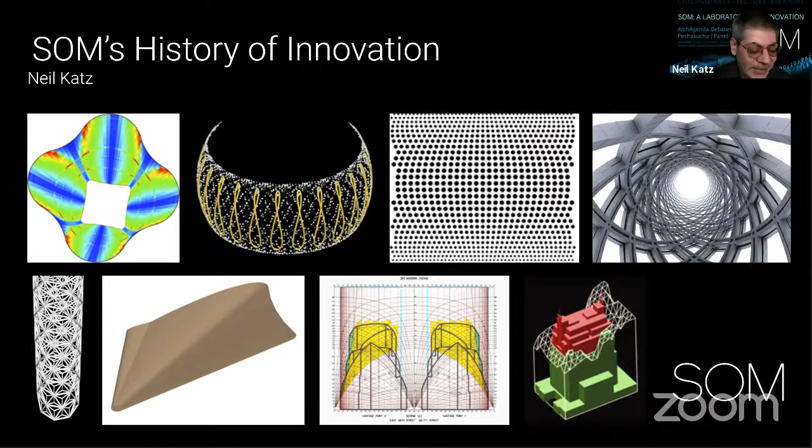Since the 70s, SOM has explored and experimented with computational devices as tools to enhance our process of design and delivery of our projects. There was no off-the-shelf tool available at that time, although there was research in this area also taking place in academics, such as at Cornell University with Don Greenberg.

SOM decided to take on their own research and develop a set of tools. The set of tools, with names like Draft for modeling, Plot for printing drawings and images, Render for visualization, SDMS for structural analysis, and several others, were developed in collaboration with architects and engineers who were eager to use these tools as they worked on actual projects.

If you visited SOM's office in the 1980s, you would have seen equipment that you would probably not have seen in any other architectural firm. If you visit our offices today, in terms of equipment, there's nothing extraordinary.

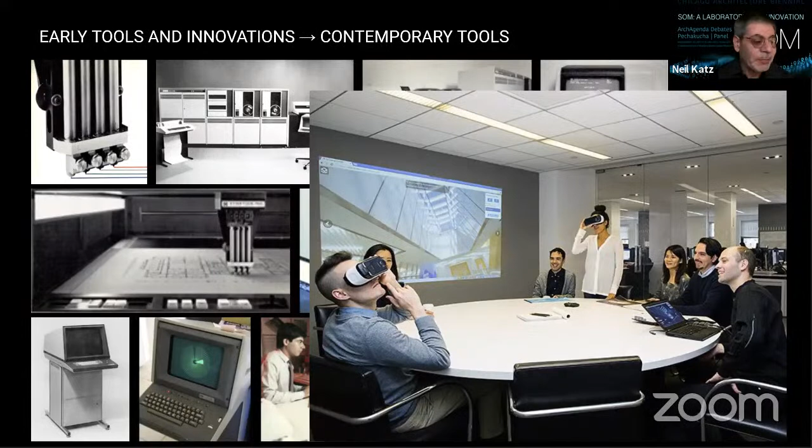But innovation, of course, is more than hardware or even software. While there are experts in the office using and developing tools and technology, our goal, since we started developing our own software, has been to distribute the use of these tools, and even the development and workflows that accompany them, among teams working on projects.

At the time of the development of our proprietary tools, SOM had offices in 9 cities in the United States. And as an example of the potential of these tools, we created a video of fly-throughs of our models of each of these cities.

Images, animations, VR, visualizations of our projects today in their urban context are often indistinguishable from photographs, so very different from what we were doing 40 years ago.

In addition to photorealistic visualizations, we use many visualization and documentation techniques, capturing physical aspects of our models, as well as aspects which are not visible.

The Hajj Terminal in Jeddah is an early example of the use of our computational design tools for both architecture and structural design. A more recent aviation terminal is an example of applying innovative computational thinking and tools on contemporary projects. These two projects share a dependence on both engineering and architectural expertise, on innovative use of materials, a focus on sustainability and natural daylighting, and on computational thinking and computational tools.

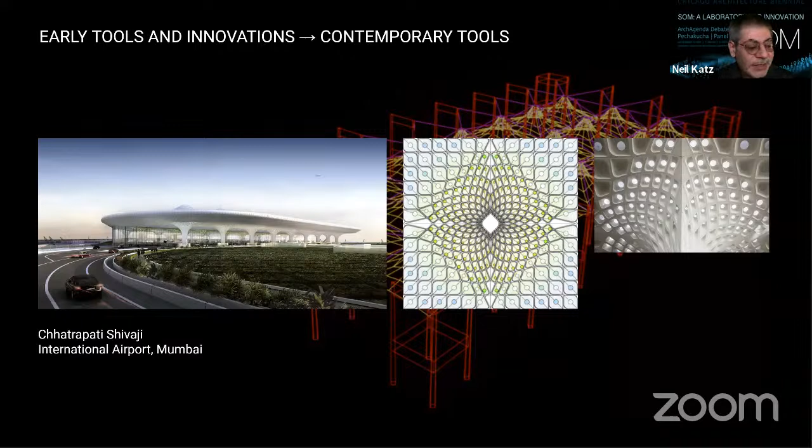There are a few projects which have spanned many years at SOM, living through many changes in technology and innovative processes. Moynihan Train Hall, an adaptive reuse of a landmark building in New York City, is one such project.

The design process, spanning about 20 years, has been modeled and designed using SOM's proprietary software at its beginning, then using our customization of AutoCAD, and then taking full advantage of BIM using Revit.

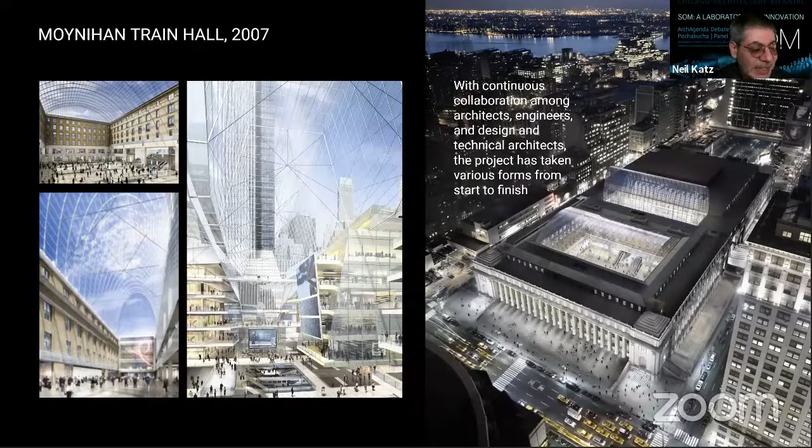From modeling the existing structure with the help of laser scanning to collaborating with engineers specializing in lightweight structures, this project has been a successful experiment in applying innovative processes and using and developing innovative tools.

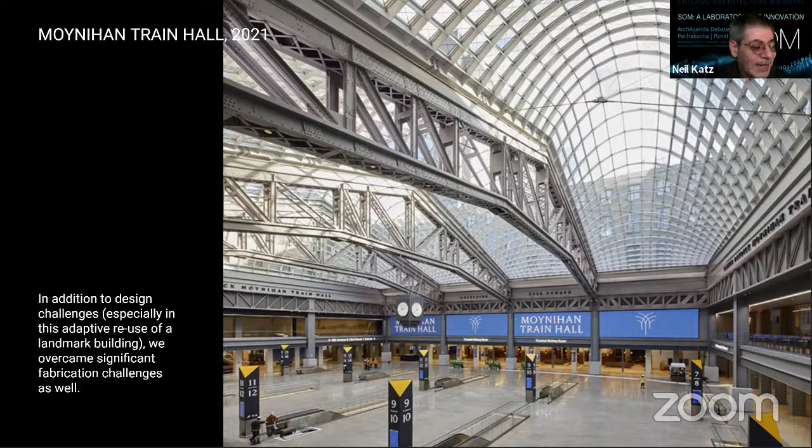Even the fabrication of the skylights of the Moynihan Train Hall requires substantial expertise in geometry, engineering and analysis, and documentation.

Interdisciplinary collaboration is a distinguishing feature at SOM. Even at its founding, Louis Skidmore and Nathaniel Owings were architects and John Merrill was an engineer. Bruce Graham and Fazlur Khan continued in this tradition, and the Hancock Tower is just one example of many. This philosophy and culture is as strong today as ever.

In 2017, SOM created an exhibition for the Chicago Architecture Biennial, which showcased the contributions of SOM's engineers, whom we also call designers in architecture. Our engineers have also collaborated with other architects and many artists.

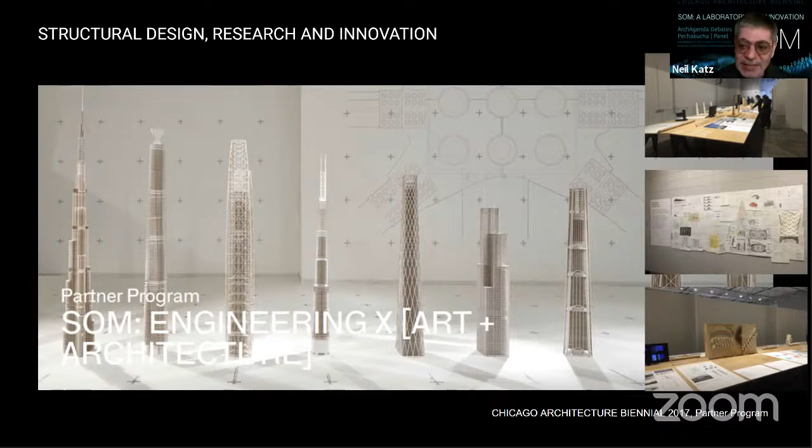In addition to the gallery of SOM building models, in which only the structural components are shown, because the structure is such a distinguishing feature of our work, each one of the models is immediately recognizable. The towers are arranged in size order, so the structural innovations to enable unprecedented heights are apparent. We also showcase some of the research that we had been doing and are still doing in structural design.

An ideal example of the collaborative nature of SOM's practice, and another one in process, is the Penn Station 33rd Street entrance canopy. Form finding with structural analysis tools and close collaboration with fabricators have led to this gem of a subway entrance at one of the busiest subway stations in Manhattan.

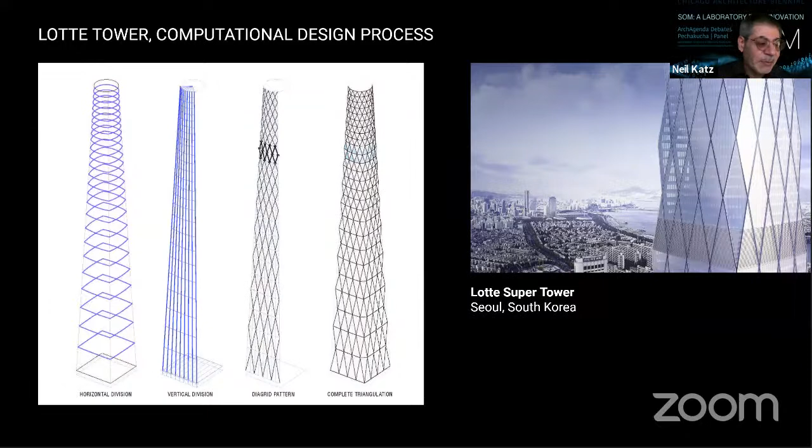Another example is the Lotte Tower, a mixed-use building with a distinctive diagrid, which varies from bottom to top, as does the floor plate. In addition to innovations in the design of the Lotte Tower, we also developed and documented in this paper a method of sharing project information, not only among project team members, but also among the various tools that the team was using.

Interoperability, which SOM designed into our own tools in the 70s and 80s because we needed to, became a challenge as we began to use different tools for different applications.

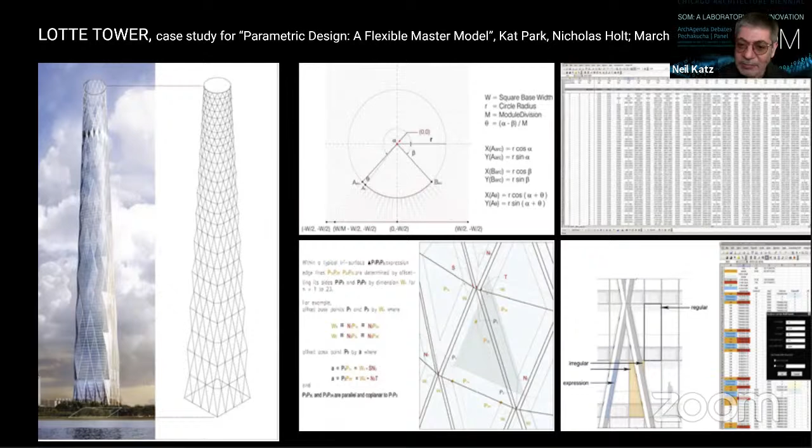Nathaniel Owings in 1969 said, 'Civilizations leave marks on the earth by which they are known and judged. In large measure, the nature of their immortality is gauged by how well their builders made peace with the environment.'

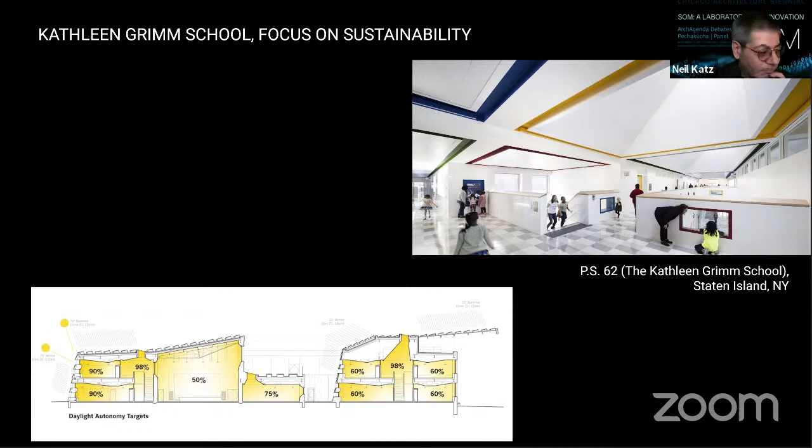There's a strong internal collaboration within SOM on projects and on research. We also collaborate externally with other design and technical professionals, with builders and fabricators, government agencies, and academic institutions.

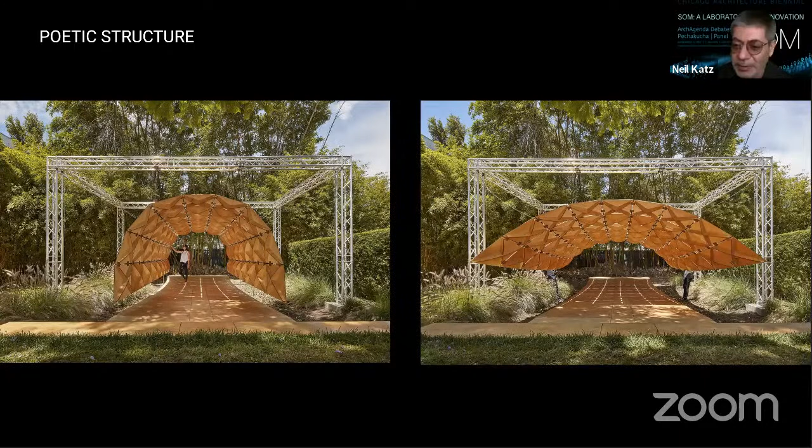To sum up, there's much to be learned from experience, and SOM's legacy and innovation in computational design, among many other aspects of design, documentation, materials research, sustainability, and construction, provides much material and inspiration for us at the firm today, and many others in the field, from students to professionals.

Research and innovation is sometimes blue sky, but most often project-focused or project-inspired, enabling us to explore ideas that improve a process, design a better project, increase efficiency both of our process and also of our projects, and expose forms and ideas that would otherwise be unexplored.

The scale and complexity of many of our projects necessitates many aspects of research, from structural systems to design workflows. At SOM, we share a passion for the projects we work on, a collaborative, interdisciplinary environment, and for the research which spins from these projects and then gets applied to many projects in many ways.

The following presentations will reveal a varied set of research initiatives at many scales, touching many disciplines. They're representative of the vast interests at SOM and the culture of our practice, which allows and encourages these innovations and initiatives to happen.

Thank you so much, Neil.

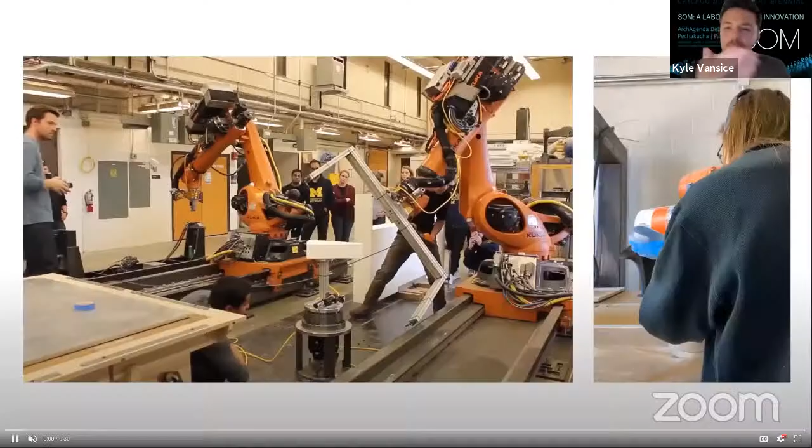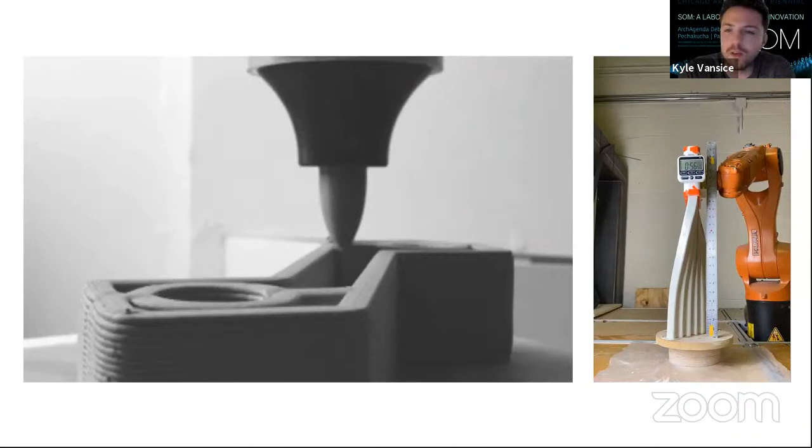This came from the legacy that SOM has of digital meets material innovation. A lot of the projects that Daniela mentioned, in response to Benton's bio, are projects where we're trying to bring what we can imagine out of the computer and use advanced fabrication to make them a reality, make it a material reality.

We've been working with the University of Michigan over the last 3 years in a series of workshops, but also studios, where we're looking at things like robotic stereotomy and robotic slip form casting, and more recently timber manufacturing, and how we can always look at what's going on in the lab and how that can scale to a manufacturing level and get directly into the construction industry.

So we have this idea of a building demonstrator that we've been deploying at the biennial, but we also want to fit into the biennial's key themes. And this year it was all about finding innovative ways to utilize what is traditionally underutilized and underinvested spaces in the city of Chicago. So the Available City was about getting out into the city, decentralizing the biennial and making it much more about the people that don't normally interface with architecture.

So we partnered up with Epic Academy, which is a charter school on the south side of Chicago, to build an outdoor classroom. There's always this kind of dueling prerogative or dueling goal. So again, what would the lightest weight timber slab look like in the context of an outdoor classroom?

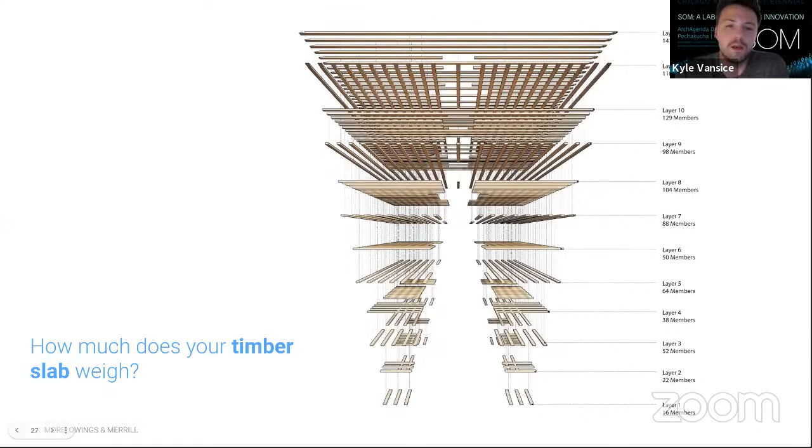And when we started to design an outdoor classroom, we found that the mission was actually quite different than what we initially expected. What we initially expected was that we needed to create a space outdoors that was adjacent to the school within its grounds, its property line, that would support certain pedagogies that you might want to be focused outdoors instead of indoors.

But in reality, and especially on the south side of Chicago, it's about creating a bridge to the community and breaking down the barriers. There's this kind of weird interstitial space between the school and the community, and no one goes there. Leondra Khan, who's the executive director of Epic Academy, was very much interested in this being a space where the community and students would come together.

And this is really important, especially on the south side of Chicago, where University of Chicago and other institutions, schools, they're large brick buildings, very monumental, and there's this kind of tradition of maybe a bit of separation between the school and the community.

So there's already been a number of classes and partnerships with Chicago State University. Epic Academy has a really cool drum line, and this was a workshop that Chicago State had done in conjunction with that drum line, looking at more traditional African American drums developed in the United States of African lineage.

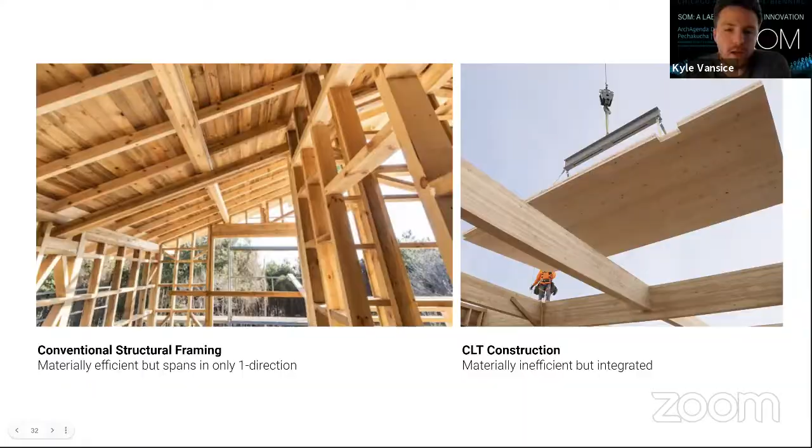As Kyle was mentioning, what we're trying to do is really find that sweet spot between conventional framing and super efficient structures. We did something similar for Stereoform, trying to find the right amount of innovation. On the left hand side, having uniform joists isn't the most efficient thing, but it's easy to build. All the way on the right, an extreme example is curved joists following the lines of principal stress—much more efficient, but a lot of complexity. So really, what is the right amount of complexity that can drive the changes we're looking for?

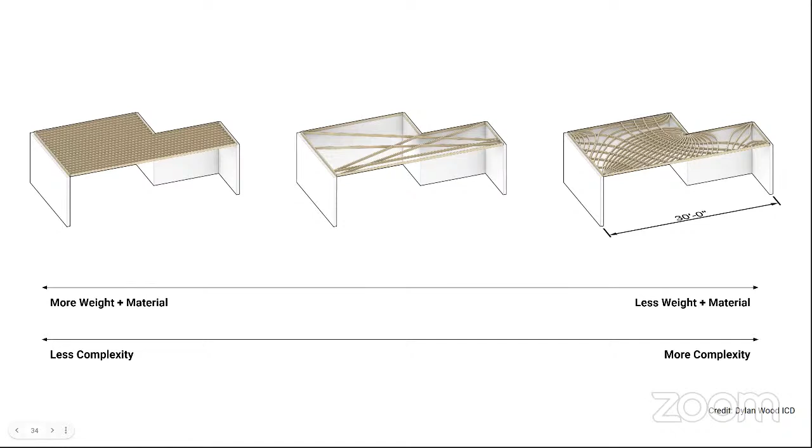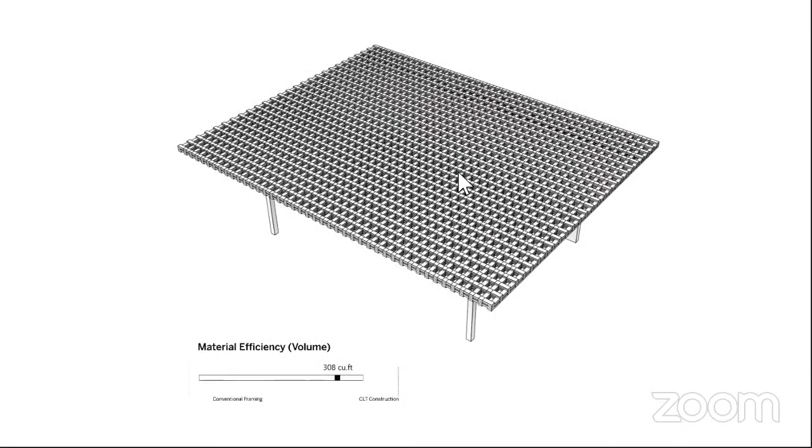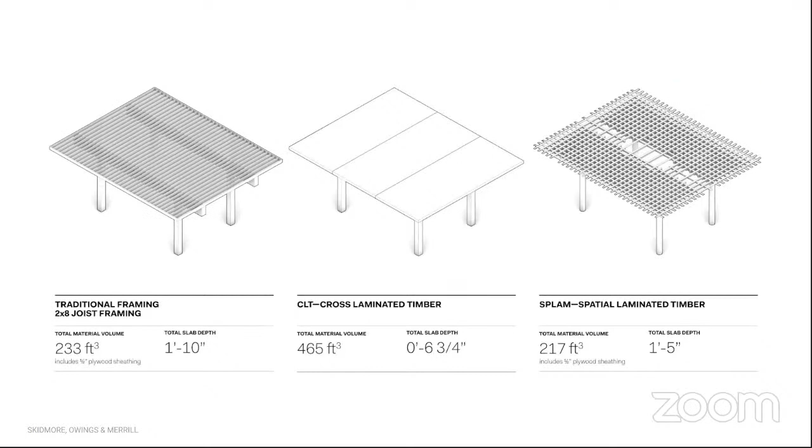After we applied this process to Splam, you can really see the value here—the material is carved away from the middle. What we're able to do is get something competitive in terms of thickness with CLT, but using an amount of material that's similar to conventional joists. I know you wanted to mention something on this, Kyle. No, I just want to make sure you saw the slide.

I really like this video where it's zooming out, because it really shows what the thing is all about. It's pulled right from the computer. You see the gaps in the middle where there's low stress points, and the density increases as it moves towards those columns and those four support points.

Yeah, the result is... Go ahead, Cal. Yeah, sorry. But yeah, so this is a bespoke design, right?

We designed it for this space, for this school, but we have ambitions to take this into a more modular level. So to do that, we really focused with Michigan on a prefabricated modular system for timber joinery. Here you see Wes McGee and Tien and a few of the students that worked on this project over the summer with us. This was a year-long studio, but it went into the summer, and fabrication actually took place in June and July, with an opening in August.

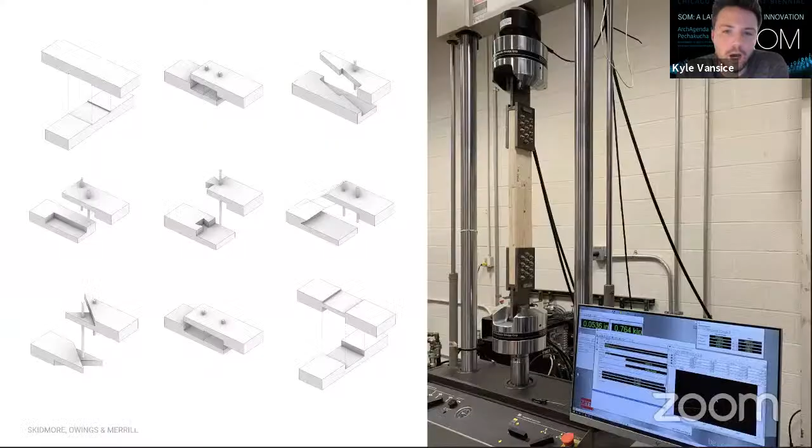We really got scientific about the joinery. It turns out that in these systems, the joinery is the most critical spot in terms of stress concentration and shear transfer. So we worked with the civil engineering department, got out our Japanese joinery books, and tested a number of different joinery types, then brought those empirical results into our design models, and used that to optimize the types of joints, the number of members, and the number of unique joints.

Here you can see a 5-axis mill creating what's called a scarf joint. But it's actually a kind of dual joint—there's a scarf at the end and then a lap joint. The lap joint is just a minimal depth joint, really to help with dimensional tolerance of the system overall.

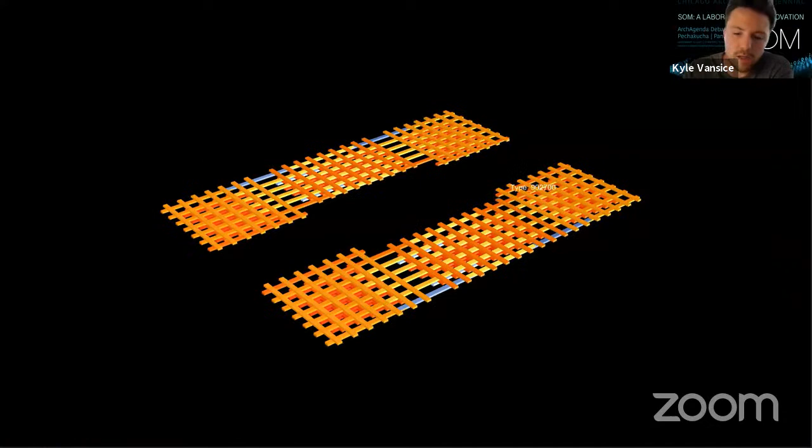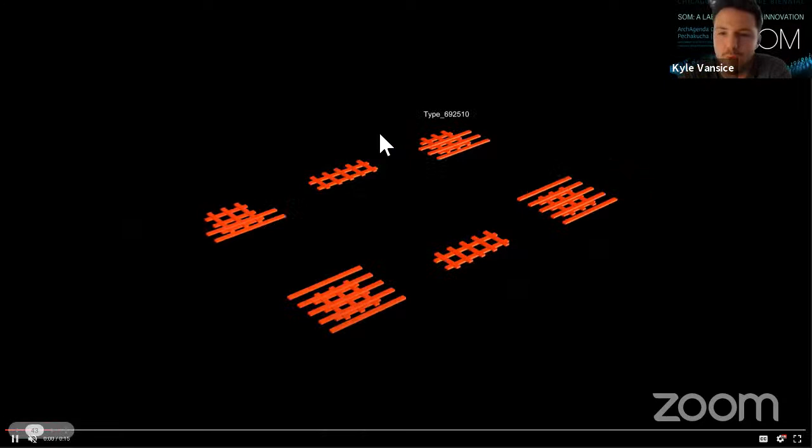We used this data and a feedback loop with the structural model to understand unique types, and ended up with 912 total members, 50 unique types. Our goal is to minimize the number of unique types—the more we can do so, the more efficient it becomes from a constructability standpoint. But the trade-off is the ability to approximate an optimal topology and create hyper-responsive systems, so there's this back and forth between uniqueness and standardization we're trying to explore.

And here they are, 912 members getting ready to be shipped to Chicago. And here it is in built form before the roof—quite beautiful, quite expressive. If you ever wondered what the lightest weight timber slab for a commercial building might look like, well, here is something probably pretty close.

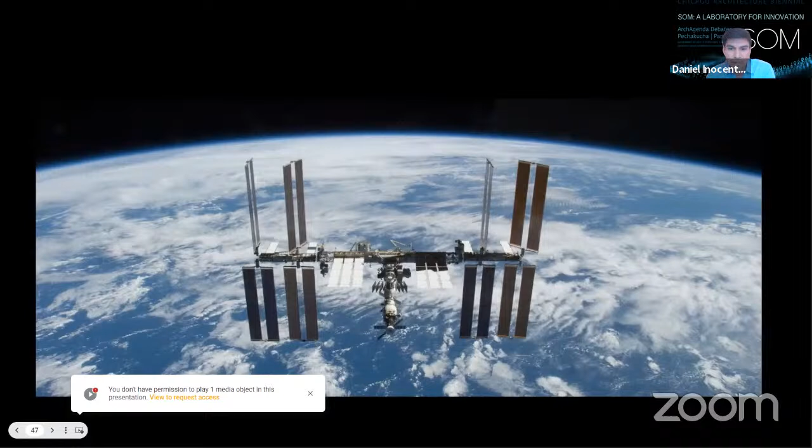At the same time, space exploration has made major leaps in the last couple years, with private companies developing and proving new transportation systems, and even creating and engineering an entirely new architecture for heavy lift vehicles like the Starship by SpaceX. But these are just a couple of examples of some of the more recent achievements by the space industry. And so one of the questions we started off with was, why the moon?

Well, out of all the celestial objects in our solar system, the moon is the most accessible, with launch windows at any time. The moon is also a laboratory of planetary science with a deep geologic history going back to the formation of planet Earth. The history of the moon is also the history of Earth, where dynamic processes make it difficult to access geologic history.

The other important characteristic of the moon is that it is in synchronous orbit with the same face pointing towards Earth, which means that the moon's exposure to sunlight is near continuous. The moon has a spin axis, which is inclined by 1.5 degrees to the ecliptic plane. And this creates these kind of microenvironments at the polar regions where you have abundant exposure to sun, but also areas where you have permanent ice deposits, which is one of the interesting things that different missions have started to revolve around.

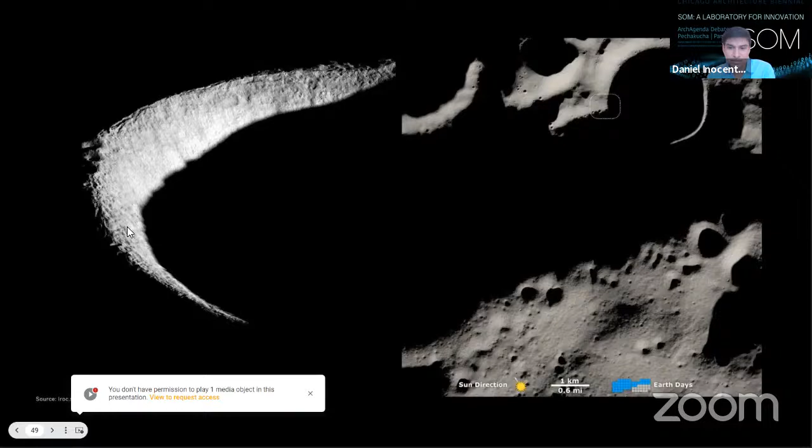So in January of 2020, a memorandum of collaboration was signed at ESA's headquarters, where we went to ESA's offices and we met with the Director General, and we signed an MOC to advance the cooperation that we had established since 2018. And so this led to a CDF study, which took place at ESTEC.

A CDF study is ESA's concurrent design facility capability, where they can conduct a cross-disciplinary effort to really assess whether your technology is being developed in the most appropriate way. The ESTEC team composition included experts from systems, mission architecture, structures, thermal materials and processes, mechanisms, radiation, power, life support, advanced concepts, just a wide range of different capabilities to really understand how the architecture that we were developing was performing. One of the key aspects of this was also thinking about future ISRU structures, or in situ resource

I'm sorry, can I—structures. Interrupt you for a moment? Sure. Okay, there's a message on here that says you don't have permission to play this media. But this is, there's no media here. The presentation is being live streamed. There's no media here. Okay, I just wasn't sure if you meant the slides.

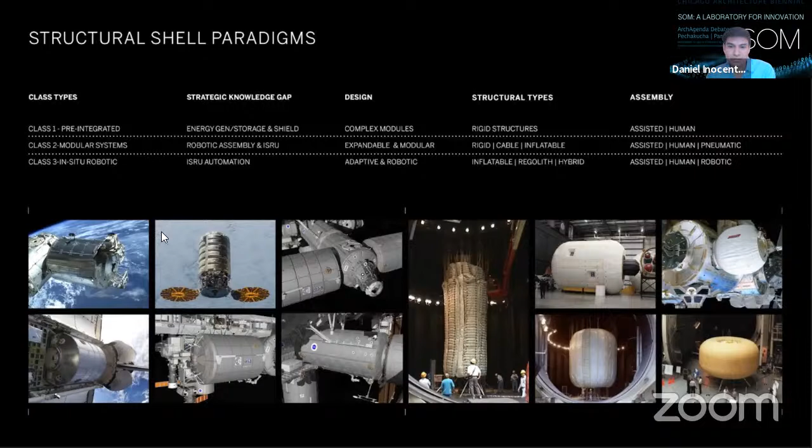We also studied a wide range of habitat architectures, most of which exist on the ISS. The ISS is currently composed of more than 16 pressurized modules, but those are primarily made from aluminum isogrid structures. There's also other types of materials being used, lightweight materials, composite materials like Kevlar and Vectran. Although Kevlar has been used in the past by NASA to study how inflatable structures could become space habitat architectures, for this study we looked at a material called Vectran, which is five times stronger than steel, but ten times stronger than aluminum by weight.

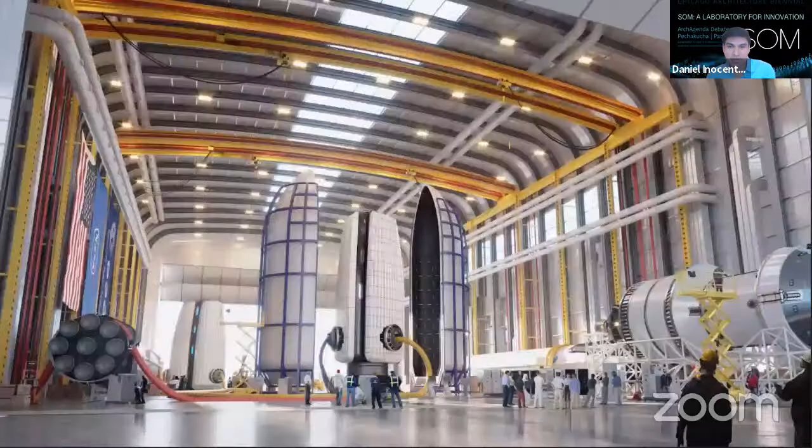And so the architecture that we developed became this hybridized system where we have a combination of both metals and composites coming together to work as efficiently as possible to create this sense of space and just basically create an environment where astronauts and the occupants can really do the work and the scientific experiments that they need to do.

And so we established a very rigorous methodology to approach the problem. First, by looking at what are the concept of operations, what are the system design drivers, and then what are the criteria that we're actually designing around. And then the mission phases—obviously there's a lot of things going into play here because space architecture is very complex. But when you think about space architecture, or just any space-rated vehicle, you have to think about testing. How do you launch it? How do you transport the vehicle? How do you land it? How do you deploy it once it's on the surface? And then how do you transfer it to its final building site where you can assemble and operate it?

In terms of human factors, there's a lot that goes into thinking about how you can engineer an environment for its occupants. Things like visibility, lighting, atmospheric pressure, temperature, humidity, physical mobility, just being able to move through the spaces, because you're in a reduced gravity environment.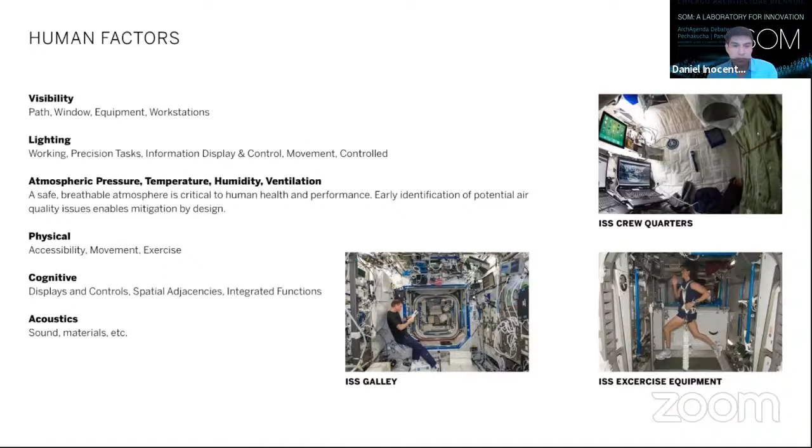And so that means that you have to think differently about the interfaces. Things like stairs have to be designed differently. And also just in general, thinking about material selection and how you can create a very safe environment for its occupants. So there's definitely a lot of different factors that you have to think about as you're designing these kinds of spaces.

And so these images just illustrate the two types of environments that we were primarily focused on. One was the working environment, and the other one was the living environment, where the living environment has to integrate as many technologies as possible.

So there's some way of approaching architecture where you're starting to think about the machine to human interaction. And there's a lot of embedded technologies in your surfaces, in your geometries, in your materials. And that really helps remove all that equipment from the spaces where you typically see that on the ISS.

And so we really try to plan this in a way where we can think sequentially about the logistics. So in its pack configuration, the outer shell actually comes in, but once it's deployed, all the equipment, the racks, all the things that are being used for experiments, all of that has to be projected to the perimeter. But it's also supported by a floor system that is kinematic and tucked in underneath the primary floor structure when it's launched.

And so the habitat really aims to address functional, environmental, and performance constraints, but also place an emphasis on human-centered design principles, which are characterized in the architecture, which is expressed by the unique hybrid structural system.

The result was a net habitable volume of 390 cubic meters and a net habitable area of 104 square meters. One of the things that allowed us to do this was that the primary mechanical systems were located within the composite floor assembly instead of in the core, where that has been studied in the past.

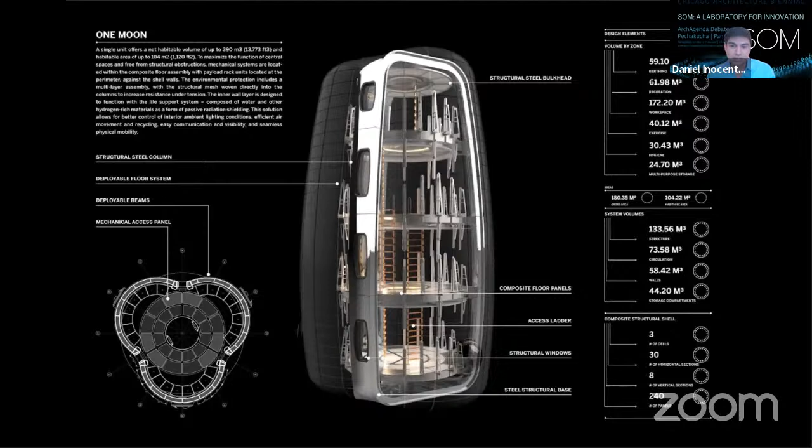And the payload rack units are mounted near the center, like I mentioned before, and then once it's deployed, they're pushed to the perimeter. And that actually improves the environmental performance for other reasons, which I'll talk about in the next slide. And that has to do with radiation, because radiation is one of the biggest challenges in space.

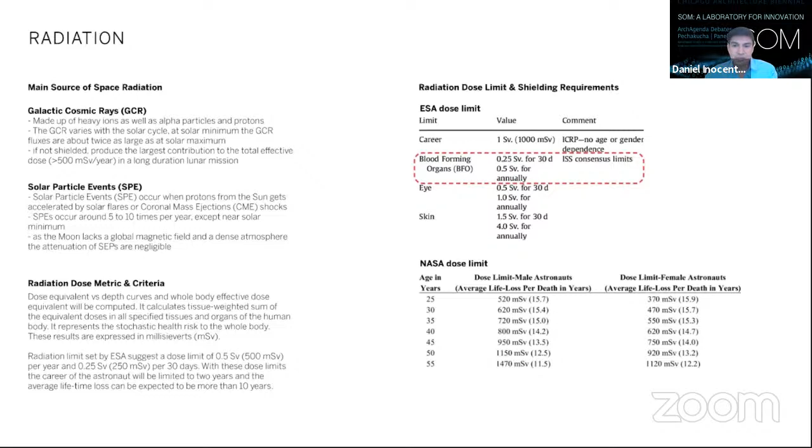And so there are already some standards for radiation. NASA has set different limits for different age groups depending on the kind of exposure. The kind of exposure is very different when you're on the ISS, for example, compared to when you're on the moon.

And that has to do with the amount of material between you and the outer space environment. And so we also studied the kinds of materials that would be the most beneficial for helping mitigate irradiation. You can see here that we're actually using an open source software called OLTARIS to look at how metals, how other composites perform under radiation. And the one thing that we've discovered, and at the same time has been documented pretty well, is that materials with a lot of hydrogen really help improve the reduction of radiation.

And so if you can bring materials together in a very unique way, you can actually help improve the overall performance of the architecture and increase the mission duration. That's why when you put more material between you and the outer space environment, it actually helps improve how the architecture is performing.

And so here you can see that we thought very carefully about how this window structure and the composite shell came together. And I think what's really clear here is that there's a lot of layers that go into this assembly. One of the most complicated things which we studied was also thinking about how you pack this assembly, because it's not just a shell — you have to think about insulation, you have to think about impact protection, you have to think about pressure seals, and then finally you have to think about the materials that the occupants are interfacing with.

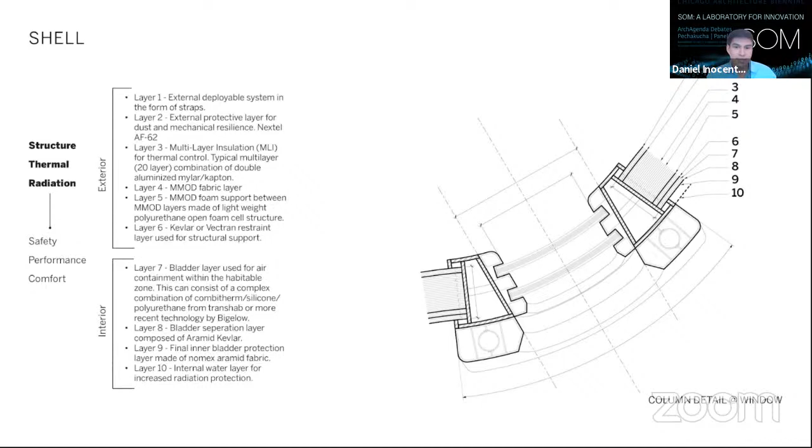The other really interesting aspect of the research was we looked at different life support systems that are in existence. For example, on the ISS, they have different technologies for oxygen generation, for water recovery, and also modules for things like hygiene and discarding waste. These are the kinds of racks that you see on the ISS.

But more recently, ESA has been developing advanced life support systems where you can actually take oxygen, recover the carbon dioxide produced by the humans, the occupants, and recycle it, compacting the system into much smaller units.

And then the other generation of technologies being developed is food production, because that's going to be something very important in space - how do you help supplement the nutrition of astronauts once you're out in space, whether it's through things like algae or spirulina, or even higher plants that can be grown inside of large chambers. So these are a few of the different technologies that we thought about integrating into the habitat architecture.

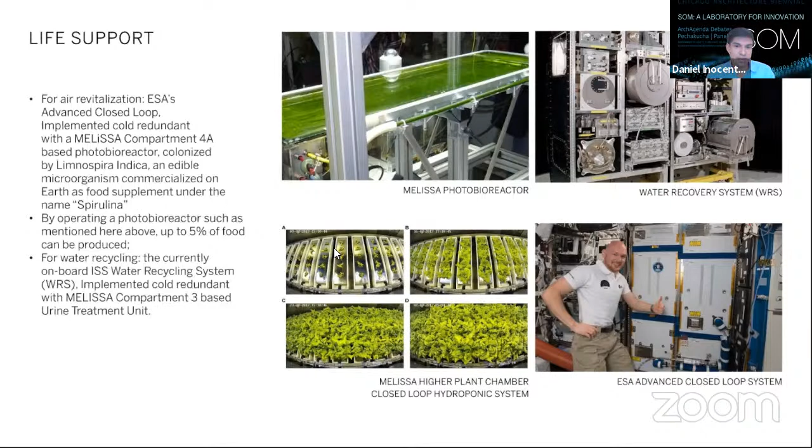One of the more interesting findings was that power, even though there is a lot of exposure to sunlight at the poles, is still really hard to capture when you have a lot of mass associated with it. For one habitat system, we needed 59 kilowatts to operate the architecture. But a solar power system, including all the solar panels, batteries, and equipment, weighs about 60 tons, which is a lot more than a fission reactor system weighing about 5.6 metric tons. So fission reactor systems could potentially make the difference between having habitat architectures and not.

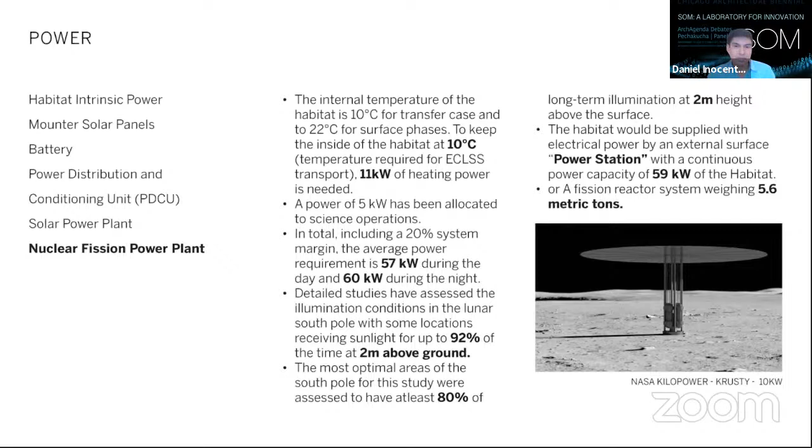And so after all this work studying the architecture, we were invited to the Venice Biennale to bring this idea of the Moon Village to Venice. We ended up designing, redesigning, and engineering a habitat that would become almost like a pavilion for people to come in and experience what this environment could feel like.

We put a lot of really interesting features into it, things like illumination controls, displays. We even tried to recreate some of the materials in a unique way. And ultimately, although we did not build this habitat architecture, we did exhibit a lot of really beautiful models and put together an animation to showcase all of the thinking and engineering that went into this project.

And so finally, we produced an animation - it's a 4-minute long animation which you can find online. It's a really beautiful way of characterizing the way that we had envisioned this taking place. And that's all.

That's great, thank you so much. Great, I can't wait to discuss all these great projects you guys are presenting. The next presentation is Georgi Petrov.

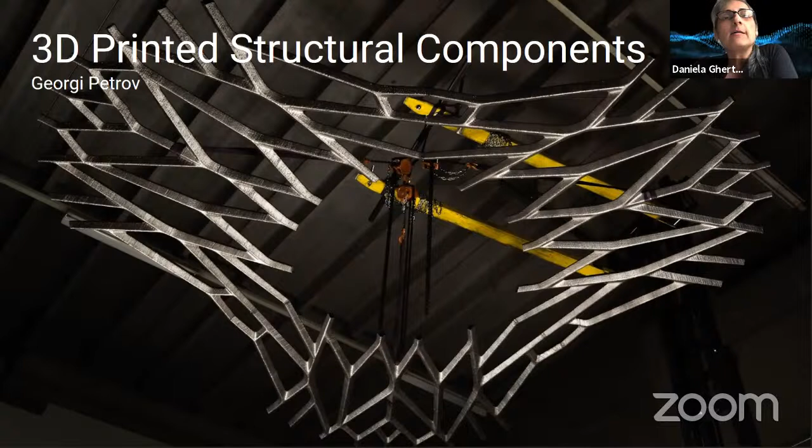Thank you very much for the introduction. Can you guys hear me? Yes, excellent.

This next project that I'll show is actually a nice pairing with the story that Daniel just described, in that when you go through these steps of different research, one idea leads to another and leads to another, and there's a great growing of knowledge that we gain over many projects.

And so when we got invited to build a full-scale mock-up of our moon module in Venice, we decided to use the opportunity to do some explorations into manufacturing as well. One key part of designing for space is that you have to be on that scale of optimal efficiency that Ben talked about earlier, because the astronomical price of taking material out of Earth's gravity field really requires optimal efficiency.

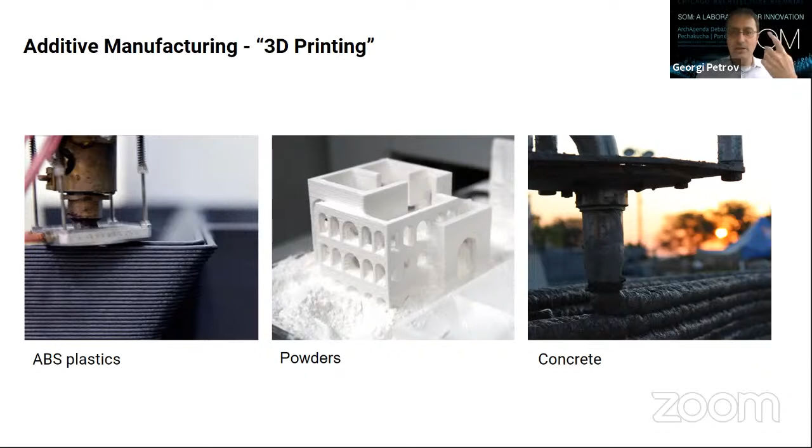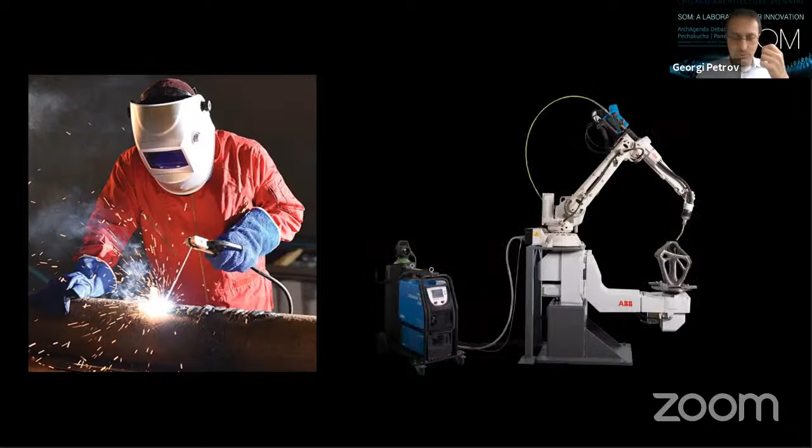These exciting new developments in additive manufacturing over the last few years is something we wanted to explore. The typical materials familiar to everybody are various plastics, powders, and even concrete. Although great for prototyping and materials on Earth, we needed something ductile and very strong that could be manufactured through 3D printing. When you think about it, welding is a way of delivering a small amount of molten metal in a precise location, and if you take a welding torch and attach it to a computer-controlled robot, you can do 3D printing in metals.

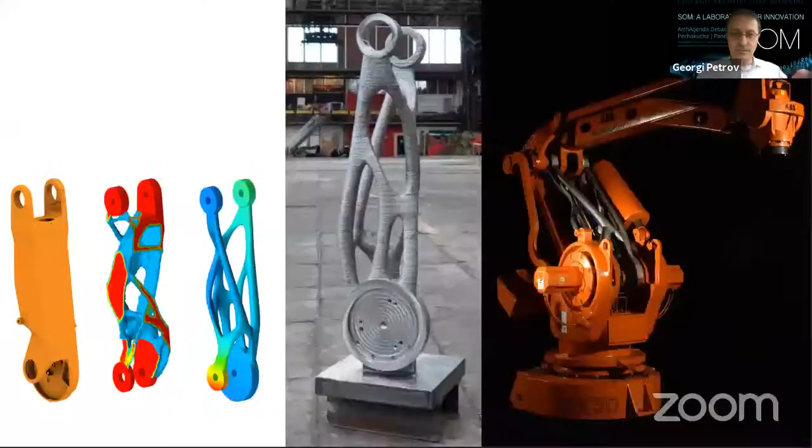Our contacts at the European Space Agency introduced us to this company, MX3D, out of the Netherlands, that specializes in exactly that. They've gotten a lot of press recently for this 3D printed steel bridge that they designed. They've done several other projects like this, where you take a typically designed machine part, figure out where the stresses really are, and optimize it.

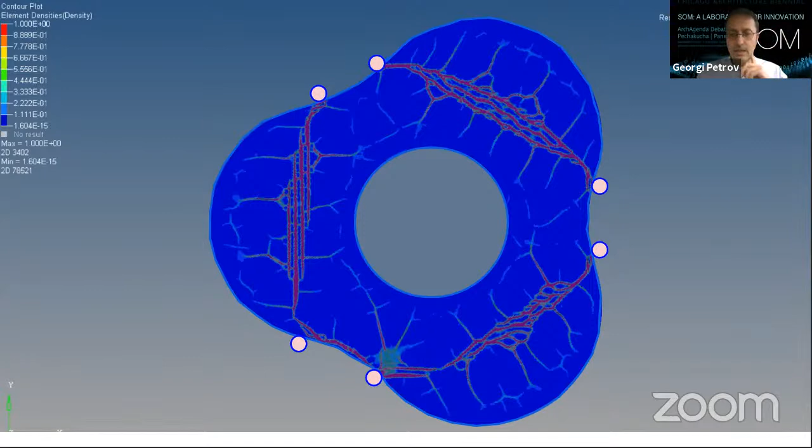For our Moon Village Pavilion, we decided to explore this to manufacture the floors of the module. We started with the design space, which is the overall layout of our floor. With that, we figured out where we want to support it in the vertical structure, in the same analogy as the actual bit that would fly to the moon. We ran our optimization process, similar to the previous project shown, figuring out generally where you want to put the material to be most efficient.

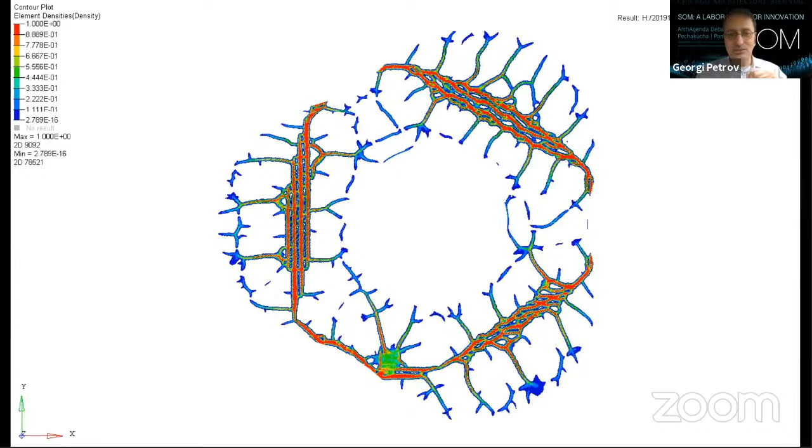Usually the results of these analyses are such that you can't just take this color graph and build it. So you have to go through several steps of rationalizing it and coming up with a pattern. This was our first stab at coming up with a very efficient floor structure that would respond exactly to the loads and conditions.

But then we started playing around with the manufacturing process, and there's always that moment where you do the design and then have to make it adaptable and build it and change it to respond to how the construction process is actually working. One big constraint is that in 3D printing metal, you're layering a molten metal that's droopy, so there's only a certain angle from vertical which you can play with. We went through many steps, re-rationalizing the geometry to work well with both the aspirations of the optimization and the capabilities of the 3D printing process.

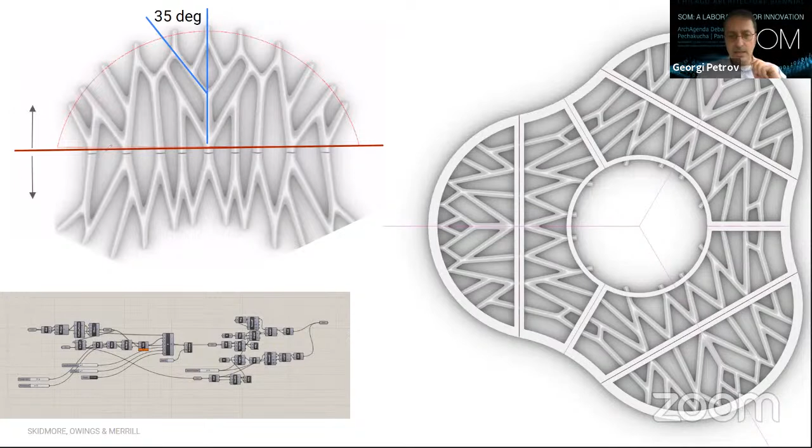We divided the floor into a number of parts, partly governed by the reach of the robots that MX3D had. We modeled all of the 3D printing steps, the angles, the way all the beads would be layered, and made sure everything fit within the reach of the robot to ensure this could all be printed correctly. These are the two types of pieces that were repeated several times, each tested before we started printing.

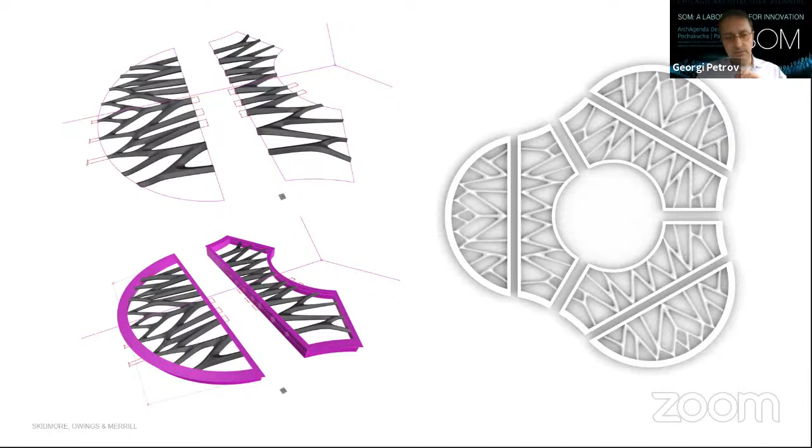We had to come up with ways to take the 3D printed material and marry it with the more regular construction of the rest of the habitat. So we came up with this idea of a typical edge piece that would hold the 3D printed material. We then went through several layers of more optimization to make sure we actually have the smallest possible members and the thinnest possible walls.

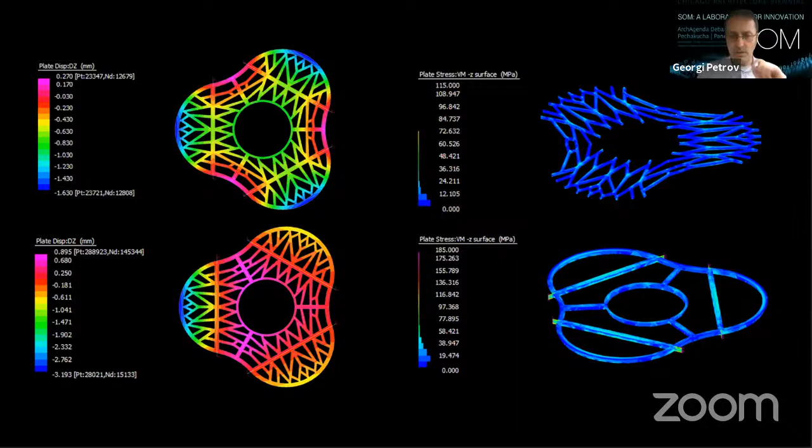The capabilities of the MX3D robots could do several thicknesses of the 3D print, and in the final resolution, most of the 3D printed material is made with just 3 mm thick beads of weld material. This is the final design, and it's how it would have been put into the capsule.

Another interesting bit is the way the jointeries and the transition from one element to the other work. We did a lot of these mock-ups of printing the different ways the branches go from one another. When you're printing on a straight branch, it's pretty straightforward, but figuring out exactly how you transition, while always keeping in mind that you're dripping a molten piece of metal and can't let it fall, is tricky.

This is a zoom in of one of these transitions, showing the frankly very beautiful pattern of the 3D printed material. And this is the final piece we had manufactured of all the floors, showing the final configuration of it.

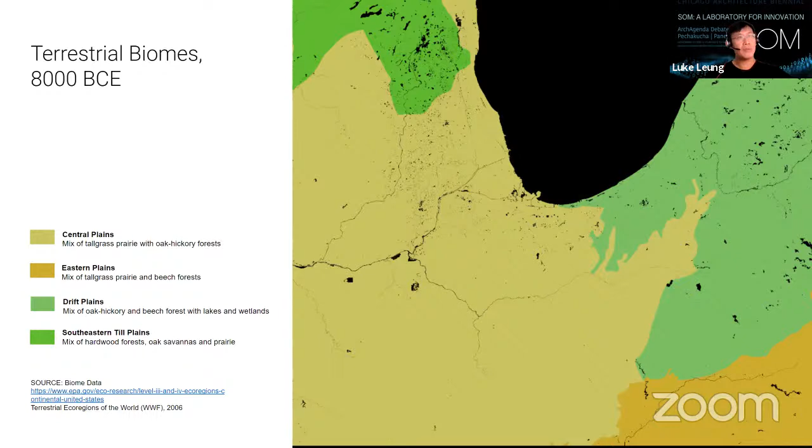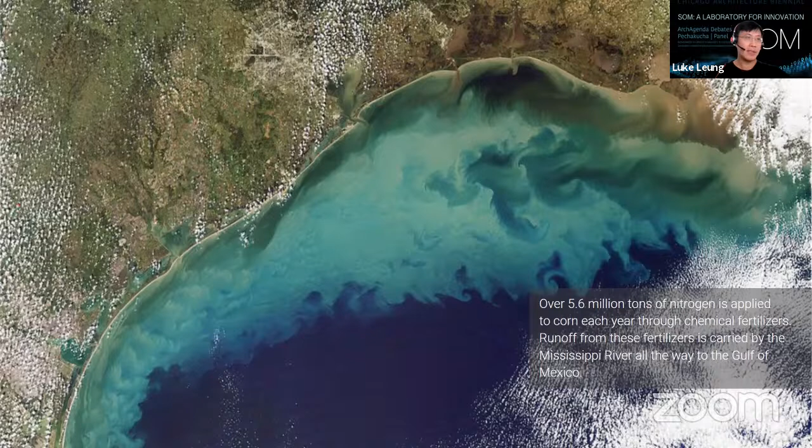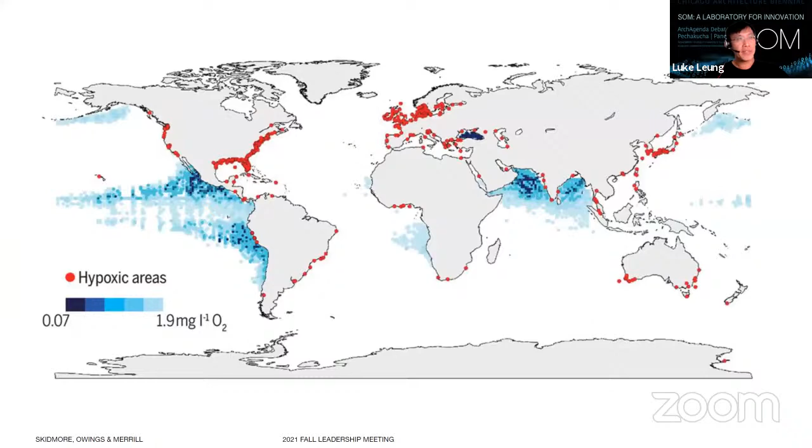Now this farming oftentimes is not sustainable and carries a lot of runoff, as in nitrogen and phosphate, into the Gulf of Mexico, creating hypoxia, which damages the ecology and also the water system there. If you think that only happens in the Midwest, look at this — it's actually a worldwide phenomenon of modern farming. And if you think that element only flows into the ocean, think twice. It also flows into the tummy of you and I.

Why is that? At one time, in the pre-industrial revolution, there was a cycle of food and waste, which got disrupted in modern day farming. There's pesticide, insecticide, and also fertilizer injected into the soil to create a different sort of system. So this stuff actually goes not only into the Gulf of Mexico, but into the tummy of you and I.

That's why if you look at the tummy microbial makeup of pre-industrial revolution people — well, we cannot go back in time, can we? But we can look at the Amish people, whose lifestyle is close to what it was. Compared to today's human beings in the typical US, their microbial makeup in the tummy is very different.

And the microbial tummy is important. It adds up to about the size of a mango — that's how much microbial you have in your tummy. But it controls your immune system, it helps digest your food, it helps your brain development, and it helps eliminate pathogens.

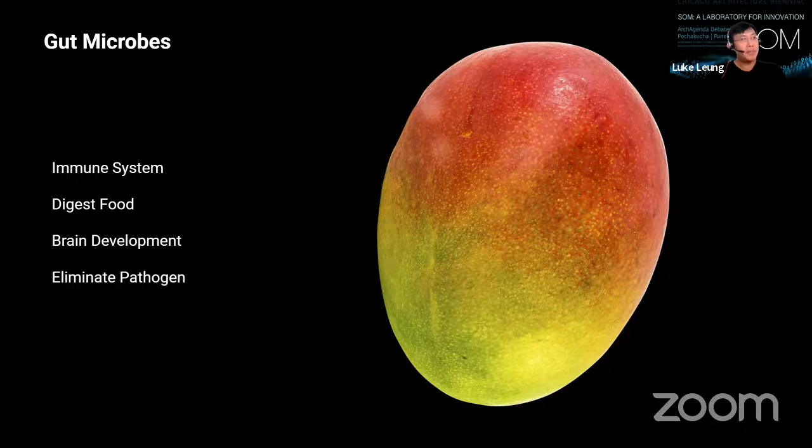Oxford University in the UK came out with different studies, and one suggests your gut bacteria is actually linked to your personality, mentally. Sometimes you think the world is changing — it's not necessarily the world, it can be you. But there are other times when you think the world is changing, and it is actually the world that's changing. And if the guy next to you acts funny, don't immediately blame him — it could be his gut microbes, or her gut microbes, not doing their job.

More interestingly, in the recent century, about 100 to 200 years, we find a rapid increase of chronic disease, from asthma to allergy — think about it, there's a person in our office allergic to chicken. How did that person go through evolution if he or she is allergic to chicken? So there's something going on here. And what we see is that gut microbes can actually impact diabetes, asthma, cardiovascular diseases, and also mental health disorders.

Some of you may immediately have an idea that maybe we will implant some of the gut microbes from other humans to the one that is sick, and maybe we'll be able to do something. Well, you're not the only one. There's already medical research going down that road. In this case, Johns Hopkins University actually transplants microbes in the digestive system from a healthy human being to a not healthy one.

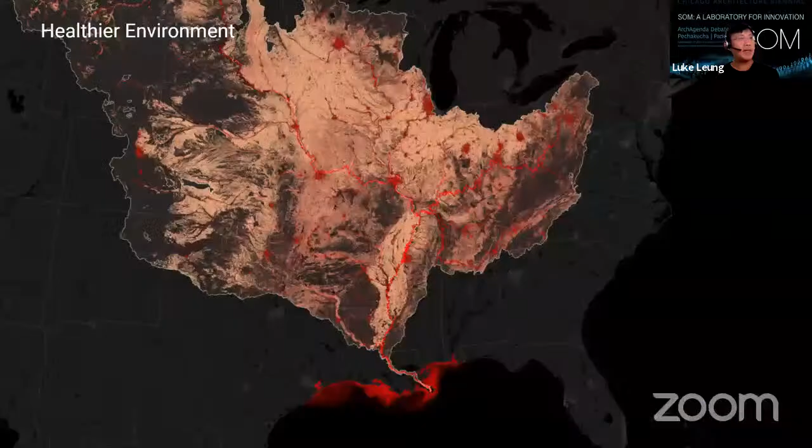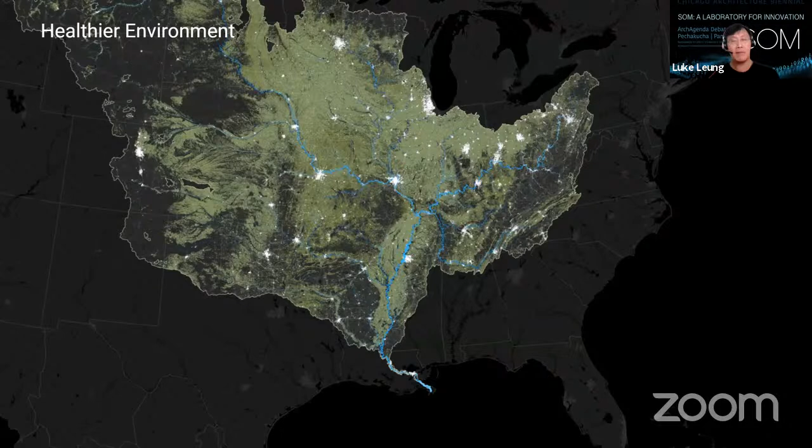Not only in the buildings, we also have to change our farms. From the current days, only 5% of farms are regenerative, to all our farms being regenerative. In that way, we will minimize the nitrogen and phosphate runoff to the Gulf of Mexico. And remember, that's not just a North America problem, it's a global problem. So we create a healthier environment.

Not only that, we can potentially create a new generation of humans that is much healthier than the one we are experiencing. So yes, architects and engineers with regenerative farms, we can save the environment, create healthy people, and yes, we will save the world. Thank you.

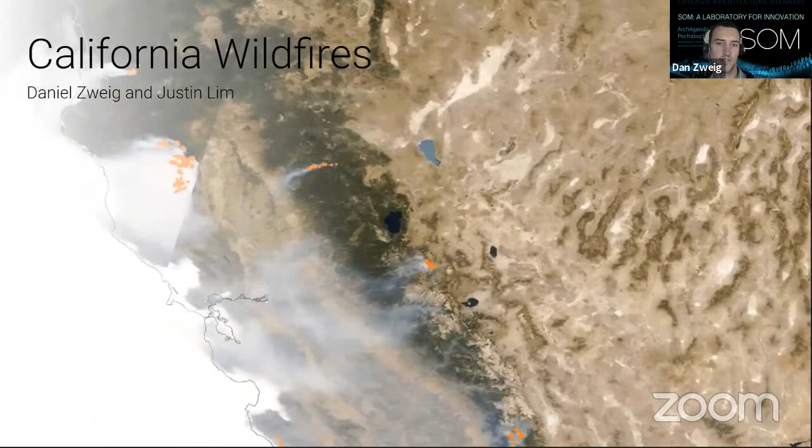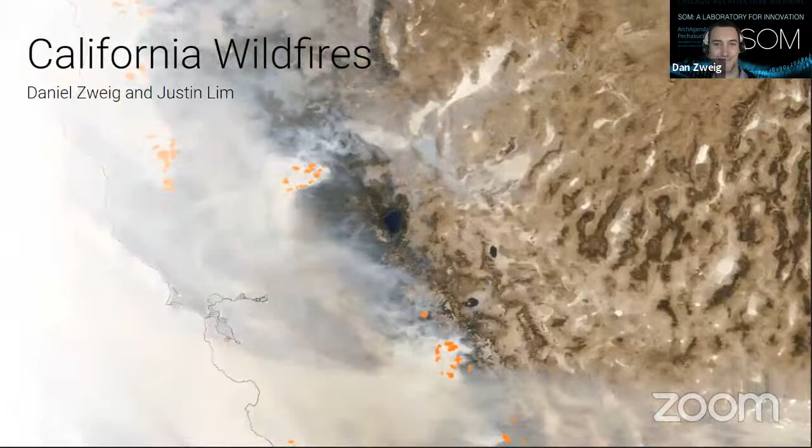Take it away. Thanks, Daniela. Justin and I are here to present SOM's research on California wildfires. Over the past several years, SOM has been investigating wildfires in California specifically, and asked how, as architects, engineers, and planners, we can do more. Earlier this year, we published a document summarizing the data we've collected so far, coupled with conclusions and a set of guidelines for more enlightened wildfire mitigation strategies. We definitely don't have all the answers, but we want to be part of the conversation and contribute to making our communities more resilient to wildfires.

Today we'll share a few pages from the published guidelines, where we look at fire mitigation measures at 3 different scales: the wildland scale, the urban scale, and the building scale. So Justin will touch on some of the history. Thanks, Dan. So these first few slides are from the introduction of the published document. We started this project by trying to understand the history of wildfires in California.

And everyone knows wildfires are no longer just an occasional natural disaster, they have become a season in the American West. And it is also increasingly becoming a global issue, as we are witnessing many wildfires happening around the world. Looking at past history, fire has always been a part of the American West landscape, as Native Americans have been using fire for over 13,000 years to renew food resources and reduce the risk of larger and more dangerous wildfires. And many of the large and destructive fires that occur today are directly related to different eras of forest management in US history.

In 1850, the US government outlawed intentional burning and required that all fires be extinguished as quickly as possible, which basically allowed forests to grow and densify without any proper management. This continued until the National Park Service and National Forest Service started to allow and mandate controlled burns to manage forests again in 1978. So nearly 130 years without controlled burns led to an unprecedented buildup of fuel loads that makes today's wildfires larger and harder to manage. Dan is going to talk a little bit about the recent wildfires and some of their numbers and facts.

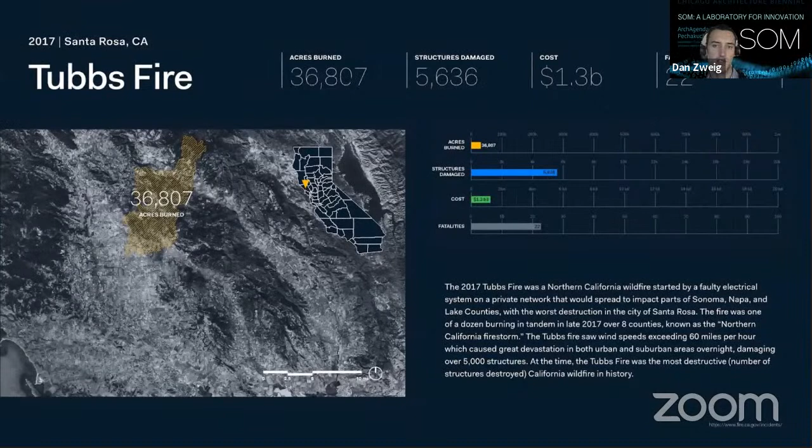Other precedents include the 2017 Tubbs Fire. At the time, it was the most destructive fire ever recorded in California history, with over 5,000 buildings damaged. Also in 2017, the Thomas Fire was the largest in California history at the time. And in 2018, the Camp Fire set records for the most destructive, deadliest, and costliest fire in California history in Paradise. I'm sure many of you remember that fire.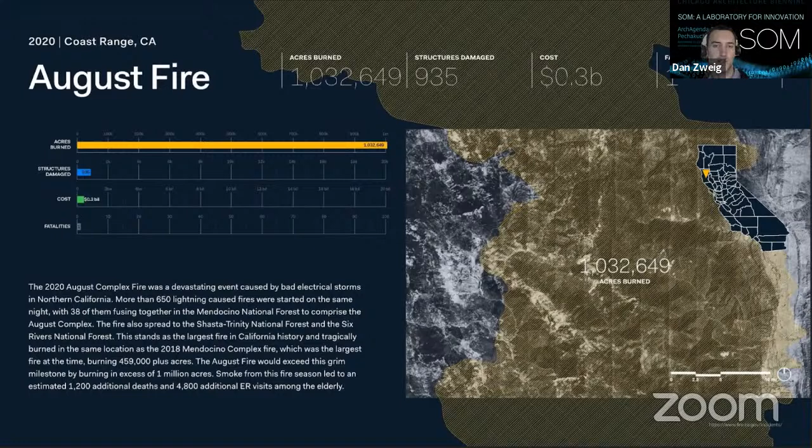In 2020, 650 lightning fires started on the same night in August. This was the time lapse that we were showing at the intro slide. The August Complex was just one of those fires, and it became the largest of those, burning over 1 million acres, which is more than most years combined.

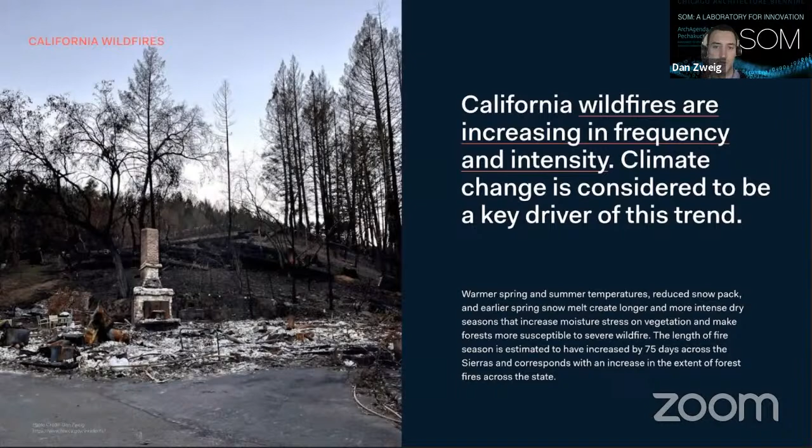So how did we get here? A key driver is climate change. The fire season starts earlier and ends later each year because of reduced snowpack and earlier snow melt. Most of the West experiences a dry season for part of the year where we receive zero rainfall, which probably surprises most people in Chicago. These dry seasons are more intense and have extended by 75 days across the Sierra Mountain Range over the past few decades. In addition, California has been experiencing more and more drought, where our average rainfall during the wet season has been at record lows.

As I mentioned earlier, we looked at these issues and guidelines at three scales. So we'll get into the first scale of SOM guidelines, Chapter 1, Wildlands.

The first guideline that I will share today deals with the ownership of California wildlands. We learned that California's wildlands are managed by a number of different stakeholders. The federal government is responsible for managing about 58%, the state 3%, and the remaining 40% is split among private individuals and Native American groups. So different ownership means there are different resources and recommendations dealing with wildfires.

So one of our guidelines is to recommend that all of these agencies come together to create a unified vision and strategies dealing with wildfire. This will also help provide the best resources for how to prepare for wildfire and how to work together to fight future fires.

Moving on to guideline 1.3, as many of you probably know, about 50% of California's largest fires are caused by power lines and electrical equipment. So guideline 1.3 recommends decentralizing power sources in high-risk areas and using solar, wind, and other renewable resources to generate energy. If we can eliminate the need for power lines to traverse through high-risk zones, then we can eliminate about 50% of major wildfires.

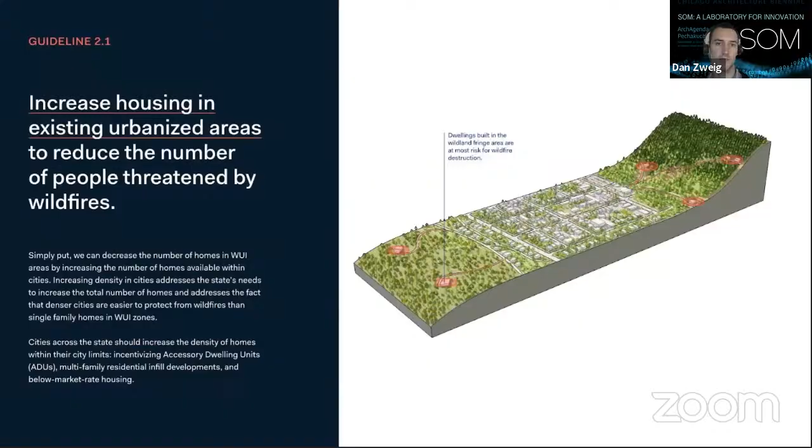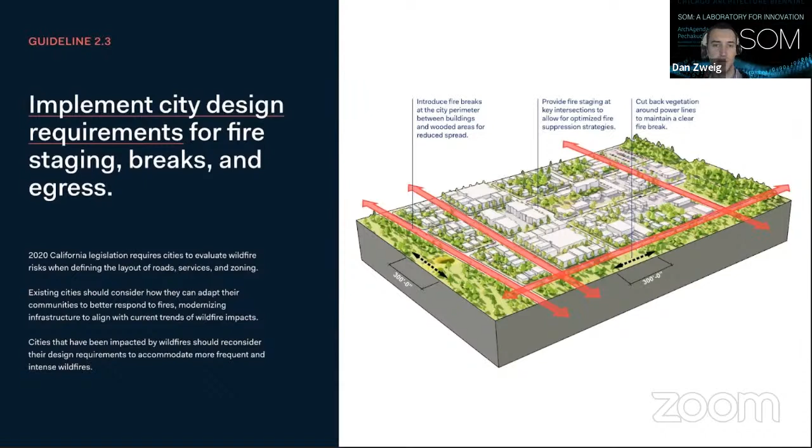So another urban areas guideline is to require cities to implement fire staging, breaks, and multiple egress routes. Existing cities should consider how they can adapt their current communities to be better prepared for wildfires, and urban areas that have been severely impacted by wildfires should reconsider how that community is redesigned instead of just rebuilding in place.

WUI codes only started being more strictly enforced and regulated in 2008. During the Camp Fire, 50% of the homes that were built to these WUI standards survived the intense blaze. Only 18% of the homes that were not built to those standards survived.

So the problem is there's no good visual representation of WUI codes. So guideline 1 for the buildings chapter is to provide better visual communication tools for these codes. Graphic depictions of these codes would help architects, builders, and reviewing authorities understand and implement the strict WUI code requirements. And then guideline 3 is for architects to provide affordable, adaptable, fire resilient building designs to make sure as many buildings as possible in California are fire resilient.

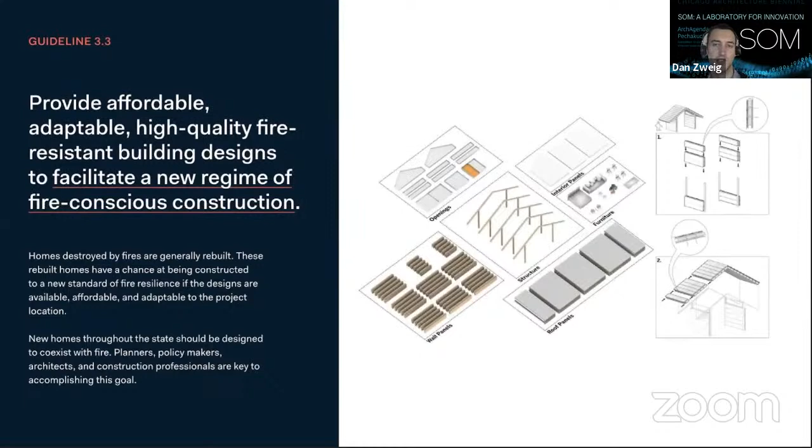Another key issue is the sheer number of people who are moving to WUI areas and the fact that WUI areas are the hardest place to fight wildfire. Fighting fires in forests costs approximately $800 an acre and $1,700 per acre in WUI zones. On top of this, the average home in California was built in 1950, long before WUI codes. So existing building codes in WUI zones are not required to meet current standards.

Building guideline 4 is for governments and insurance companies to incentivize fire-resistant upgrades in high-hazard zones. This would offset the costs from fighting fires in WUI zones and paying insurance claims for homes destroyed by wildfire. The state has already started to commit to this effort, but more policy and incentives would help accelerate the process.

Welcome. Thanks, Daniela. Hi, everyone. This is Stephanie Tabb and Grant Cogan, and we'll be sharing SOM's Urban Development Prediction project, which is an application of machine learning at an urban scale.

This project expands upon machine learning research within SOM's architectural and structural practices, focusing on the largest scale of our work, the city. This research was conducted as part of SOM's Year 1 Accelerator program for recent graduates in 2018. For most of the team, this was a first experience with machine learning, and because of that, a critical goal for the research was to lower the barrier of entry for machine learning and encourage its future use within SOM.

Our research initiative was grounded in a fundamental question about leveraging machine learning as a tool for design and discourse between designers, developers, and policymakers. Although this research focuses in on a specific design question through the lens of San Francisco, this research is at its core an exploration of process.

How can machine learning disrupt the traditional means by which we discern patterns in something as dense and complex as the city? We quickly discovered that the immediate benefit of incorporating machine learning into our design process was the granularity and precision with which trained machine learning models can discern patterns across vast quantities of data. Not only can a trained machine learning model provide a diagnosis of our urban fabric, revealing patterns and trends within our cities that might otherwise be hidden, but it can also provide a predictive lens by which we can see how design interventions and changes in policy might shape the trajectory of our evolving urban fabric.

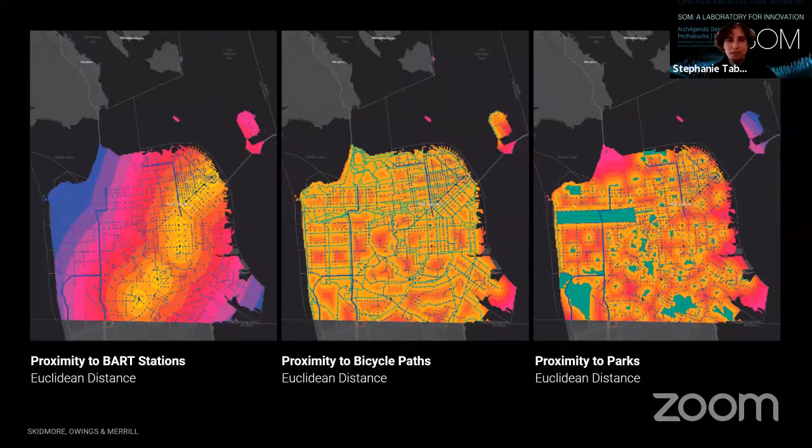In addition to the development pipeline dataset, additional open source data was incorporated to comprehensively describe the various architectural and urban characteristics or features of every property in the city. To provide geographic insights, the team also crafted additional data that describe spatial adjacencies and proximity to notable urban features like parks and public transportation.

These spatial datasets include other critical adjacencies like proximity to seismic hazard zones and other features related to resiliency. This comprehensive and detailed dataset is the basis by which the machine learning model will learn and then predict susceptibility.

The dataset of known urban features and the target of development susceptibility, also known, this research specifically implements supervised machine learning, where algorithms learn from labeled datasets to accurately classify data, discern patterns, and predict outcomes. Supervised learning in particular requires an active hand by designers, first curating a landscape of relevant data and defining a design question that is classifiable through which to train the model.

The model was trained by a random subset of pipeline and non-pipeline property data, after which the resulting algorithm was tested against a different subset of data to validate the accuracy with which the trained model could predict the known outcomes.

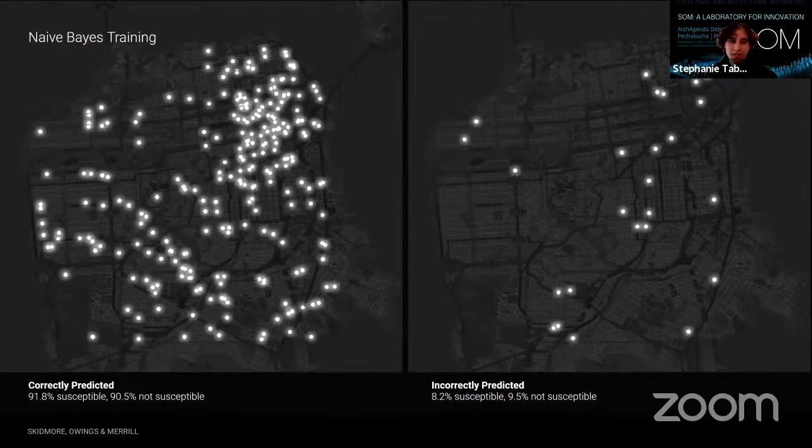We trained three different algorithms, and the overall accuracy of the trained models was impressive, with only a few properties being incorrectly classified, as seen on the right. Between logistic regression, naive Bayes, and random forest, the differences in accuracy between the algorithms was pretty marginal.

Our team elected to proceed with logistic regression as the backbone of our model, given our interest in understanding the importance or weights of certain features, allowing us to more readily compare which urban characteristics, be it a zoning boundary or an architectural characteristic, had more weight in determining a property's susceptibility.

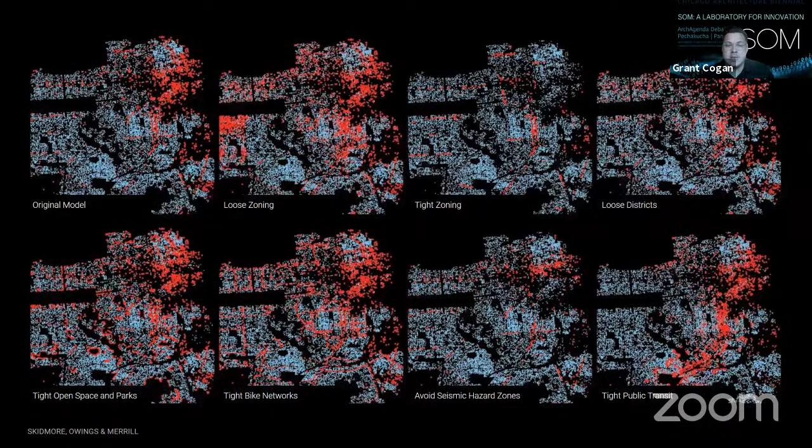We'll close with a proof of concept of what this research would look like if it were developed into an interactive design tool that would invite city stakeholders, designers, developers, and policymakers alike to consider the impacts of our decisions at the most granular level. In visualizing different futures of our city, we can ask ourselves which trajectory aligns most with an urban fabric that is more equitable, resilient, sustainable, and healthy, and how do we challenge and reorganize the forces that shape our city to arrive at that desired outcome.

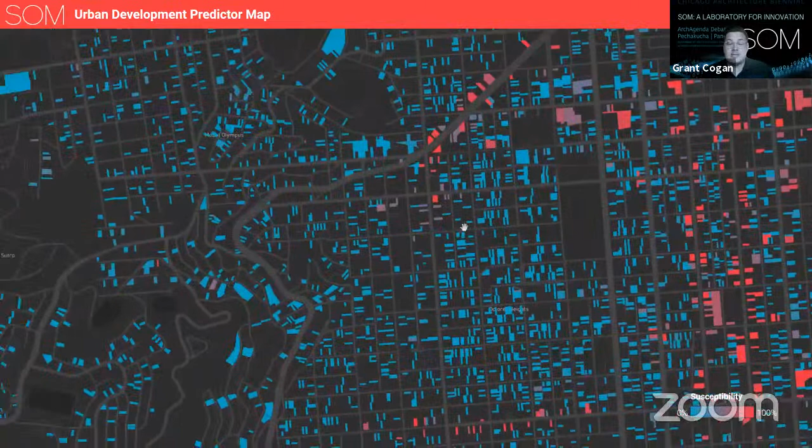And as we mentioned before, this project is fundamentally about process and what machine learning can unlock for designers. We can imagine its application in our studios to not only predict trajectories of development, as you see here, but it could also be leveraged as a tool to advance some of the other research you've seen today, such as the California wildfire research that Justin and Dan presented. And with that, I think that's the last of our research. Thank you.